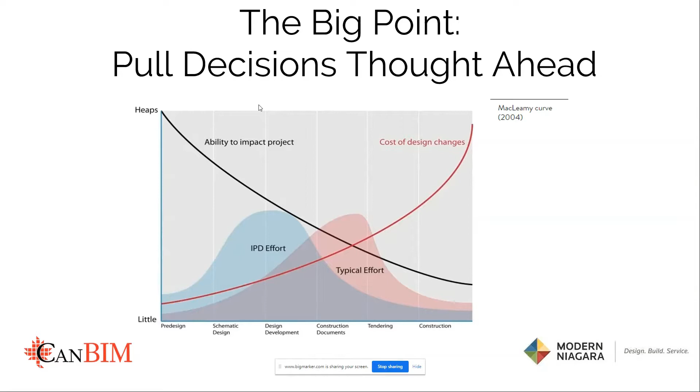So with that in mind, this is the first part, which is probably the biggest part of this presentation: the day that the Calgary CanBIM audience, that's you guys, saved $1 million with a toilet. My hope is that this concept, A, makes sense, and then B, it can sort of spread a little bit, because I think we've got something here.

So I work for Modern Niagara. Modern Niagara is a mechanical contractor. We've got offices in Toronto, Ottawa, Calgary, Edmonton, and Vancouver. And we do a number of different institutional, commercial, light industrial projects across Canada. So we know toilets. That's what we install day in and day out. My hope is that we can teach you about toilets.

So this will blow your mind. That right there is a wall-mounted toilet. You can see it's wall-mounted because it's not on the floor. This here is a floor-mounted toilet. You can see it's a floor-mounted toilet because it's on the floor.

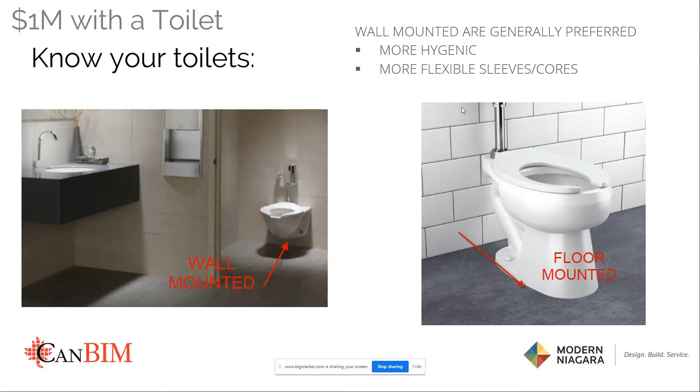What I've seen in 15 or 20 years of being in this industry is that I have not seen many commercial floor-mounted toilets. Most commercial, institutional, hospitals, data centers, office towers, they always use wall-mounted toilets because it's easier to clean underneath, and it allows a little bit more flexibility in the construction process. A floor-mounted toilet has to be perfect. The hole that goes through the floor has to be perfect, and that means the wall has to be perfect after the fact. That's why there's usually wall-mounted toilets. I've probably seen 5 total in my career for floor-mounted, maybe 20.

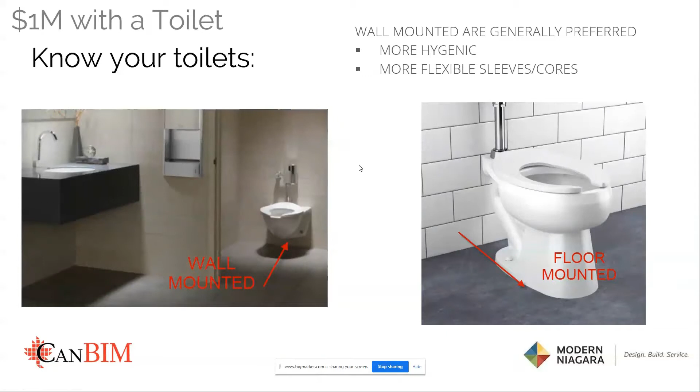So what you may not know about is what attaches the toilet to the wall. There's this thing behind it called a carrier. It's a structural piece that does a bunch of stuff. It creates a solid attachment from the wall to the concrete below, because that's the strongest thing that we've got to attach to. It's allowing for slope drainage, which I'm going to get to later. And it also allows for the flexibility of the wall thickness, because sometimes walls have different thicknesses depending on if someone has some fancy tile or paint or wood or whatever on the wall.

It also allows for deviations in concrete. I'm not sure if this is evident, but concrete sometimes has little bows in it, depending on where it is between the columns. Also, tile thicknesses can sometimes be adjusted mid-project. And then there's also mistakes. So the carrier fixes a lot of issues as listed above.

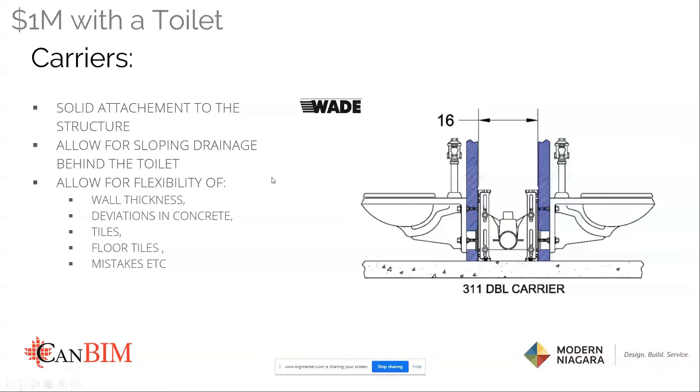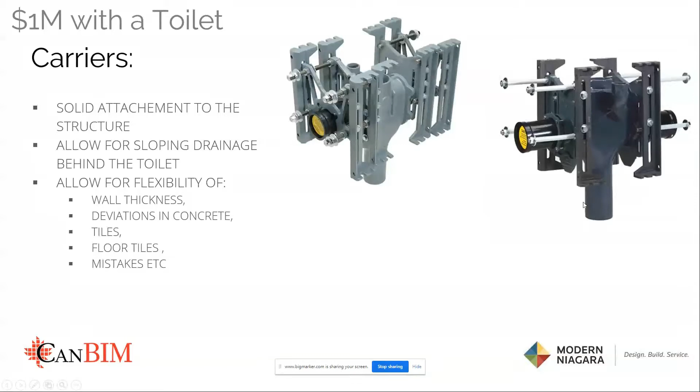This is what a carrier looks like. This carrier right here is for bariatric patients in hospitals. It's very, very strong. It can hold 1,000 pounds. This is a more normal vertical carrier. A lot like that floor-mounted toilet, it involves a really high level of commitment. Here we've got the horizontal carrier, which I'm going to refer to later.

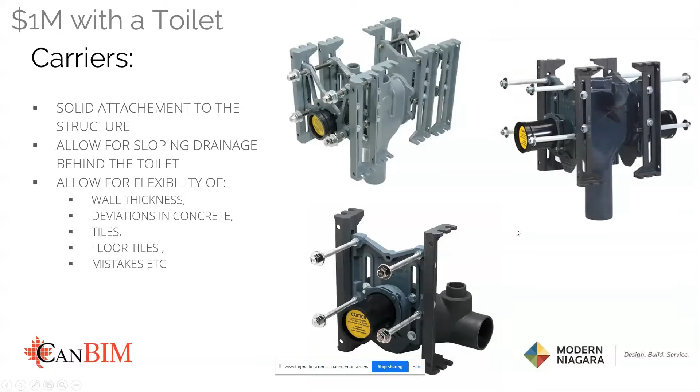The waste comes through the back into the toilet, and then it goes off this way. Fun stuff and exciting stuff, I realize, but I'm getting somewhere with this. So here's the carriers being placed on sites.

So previously I was saying that you need to allow for slope drainage. If you can see here, the pipes are sloped ever so slightly from one end to the other so that there's a drainage fall. You can see it really pronounced here. It's going to this direction to the left. So here's a little higher and here's lower, and that's what all these bolts are achieving here.

You're allowing the slope to exist and still have the toilets at the same level, because if you looked at them and they were all different heights, that would be weird. So it makes the architect and the client and the cleaning and everyone else happy, because it looks the same, but behind the wall, everything's changing a bit.

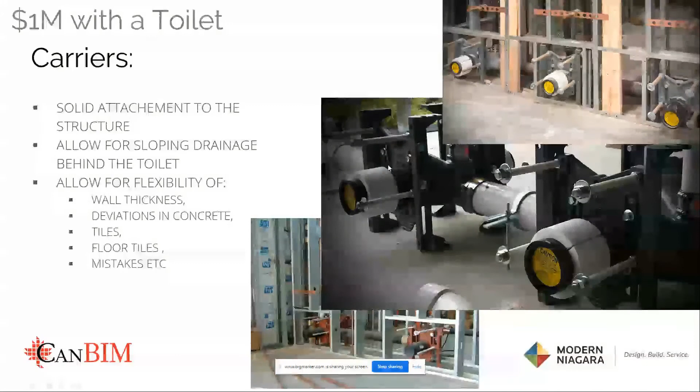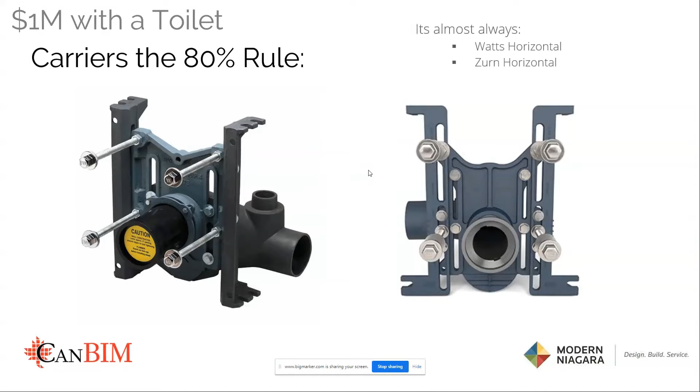So there we are. Now, one of my mentors was a foreman at Modern Niagara. His name's Lee Mehta. He's probably one of the smartest people I've ever met. And he had a rule. I went and asked him when I was like 24: what should someone do if they want to do a good job? What's the secret, from someone who's 60 years old and has seen many projects across Canada? His quote was, "The best projects are sleeved well and the worst are not."

So I'm not sure if you guys know what sleeves are, but I'm going to underline this. Again, a lot of what I'm saying here may be realized by, I'm hoping there's some consultants in the room.

I asked a question in the Q&A, Curtis. I don't know if anyone's answered it. Have we got any consultants or owners in the audience? Curtis, you there? We haven't got any answers yet. Yeah, right here. Did anyone answer that? I can't see that. We've got nothing on the Q&A yet. Okay. All right, so I'll move through this.

So a sleeve is literally a commitment cast in stone. I'm showing pictures of sleeves here. If you look on the floor, can you guys see my mouse okay? Yeah. So here you can see all of these sleeves. Basically, they're tubes that are placed before the concrete is poured. They're a very, very high commitment item, and they cost a lot to implement well, and they cost even more to get wrong. So I'm going to go into that a little bit later.

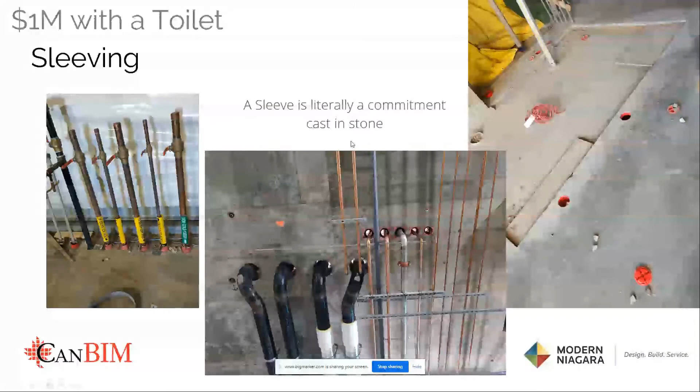So what is a sleeve? A sleeve is a hole through concrete, but it's a commitment. It's a commitment cast in stone. So here we've got a horizontal carrier that we've talked about earlier, and then there's a sleeve through the concrete. These are sink carriers, and here's a close-up of it.

And we use Trimble survey laser rangefinders to position our carriers before anything else is placed in the building. This is a very accurate process. We do it well. Historically, we used to have a failure rate of around 6 to 10% on our sleeves. Now, on our most recent projects, we're actually getting below 1%, if not 0.5%, which is pretty amazing. That level of accuracy has happened in the last 4 years, which is pretty great.

So the sleeve here that needs to happen is defined by the sink. In this case, here it's defined by that toilet. If you look here, the sleeve, I'm going to get to this later, the sleeve is driven by the place of the toilet, not the other way around. And there has to be a lot of precision here because you haven't got a lot of room for extra pipes or whatnot. You can't fit any extra bends and all that. You have to do this well. And if you don't, you're into a pile of trouble, which I'm going to get to shortly.

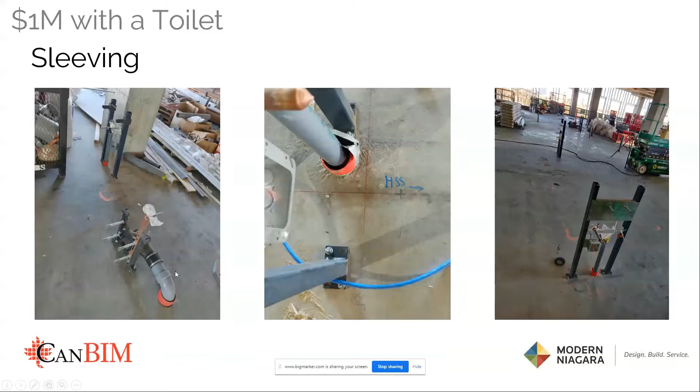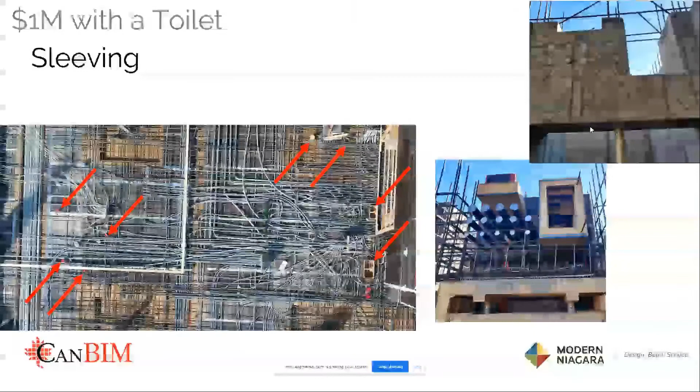The things on the right are wall sleeves for a Canadian Nuclear Safety Commission approved LINAC vault. And it shows, again, the level of detail and multi-trade coordination that has to happen with sleeves. Back to Lee's comment, a sleeve is a really big deal, and it's hard to get right. And if you get it wrong, what happens if you miss one? Well, the answer is it's not good.

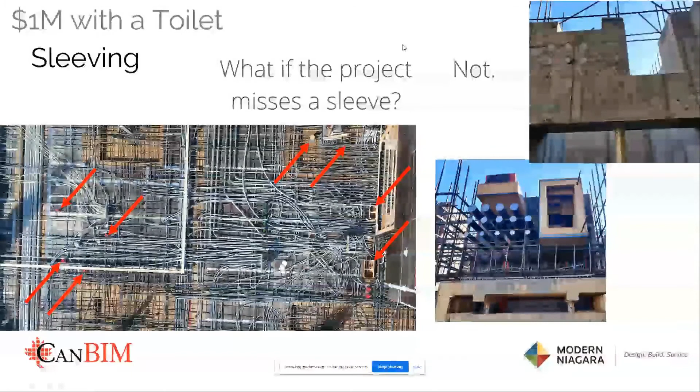So if you do miss one, you're going to have to do something like this, which is called coring. Coring is a nightmare. It's really, really bad. I'm sure most consultants and owners, if they've heard of this kind of thing, think, oh, the trades have to do a core. That's crappy for them, and it is. It's really bad for the trade. But I'm gonna try and make the case that it's not just bad for the trade; it's bad for everyone. So here's a story of a core.

Step one, we think we've got a toilet figured out, and we mobilize our site laborer, site installer, and journeyman tradesman or apprentice tradesperson to go and install one of those carriers and the pipes and all that stuff around it. So the worker goes there and mobilizes to the location where there should be a sleeve. He's happy, he's good. Step two, the site worker finds no sleeve, but only after searching for it for a half hour because they hope that there's a sleeve. And now they're going around bashing on the concrete, trying to find if it's been slightly covered by a little bit of concrete. So they've wasted a half hour.

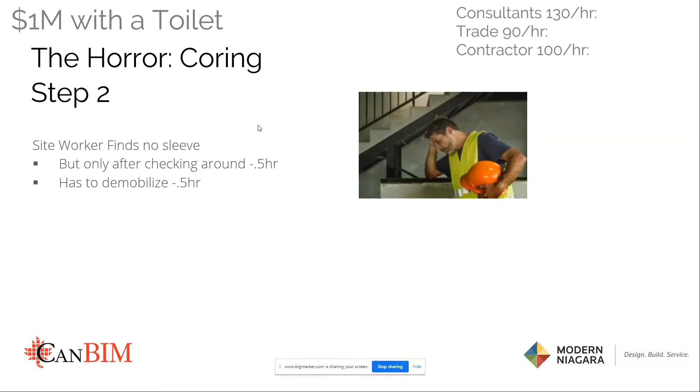Then they have to demobilize, because all of that pipe that was on their shoulders is now not useful, and they have to go find another job. So they have to go back to the site trailer or their site foreman and figure out what's going on, but only after they've talked to the site lead and the site lead has come and looked at the problem and realized that the problem exists and what the hell they were going to have to do about this. So the point of this is we're now out $135 for one sleeve on our site labor.

Now the office staff is engaged. So the project coordinators, the BIM staff, the project managers, and the trade office are now engaged with a problem. Someone has to go capture photos. Someone has to find alternate routing, looking around on the site and possibly in the BIM model. Coring and X-ray has to be performed.

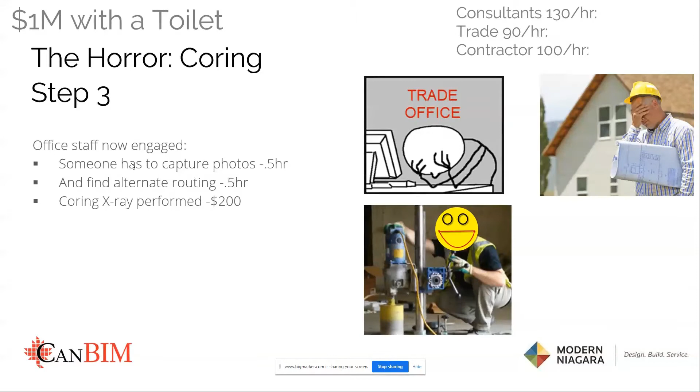The only person who's happy in this one is the coring supplier or installer. It's usually subtraded out because it involves a lot of expertise, such as using X-rays, seismic or ultrasonic scanning. It's expensive. Each sleeve is going to cost roughly $200 for finding what's below. And if you remember all the concrete and conduit and the rebar and all that stuff, that's going to cost $200 each time because you have to scan everything.

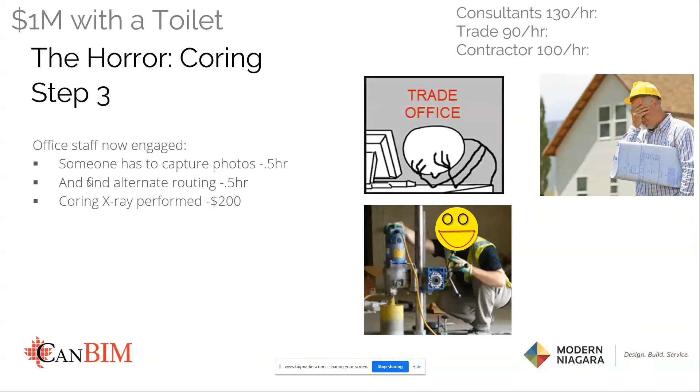Oh, sorry, and the PMs have to write an RFI to officially submit to the project team, which is the GC and the consultants. So now we're at $850 minus out of the trade contract. They typically don't get paid for it. This is all ripped out of profit, which is not good.

Again, if you refer to my earlier sentences on previous projects, we've had 1,000 cores, which was actually deemed to be pretty good on a major hospital. On our recent hospital that we're working on, we're below 200 at this current stage. But there's a hitch, which I'll get to later. So now the RFI gets sent out.

Misery loves company. The GC has to go and read through an RFI about a core, which is going to be complicated. The consultants have to go and review that same RFI. They have to figure out where it is in the building, go through all of their drawings, figure out what they tried to do, and then look at the problem and see what they think of the solution, or come up with a solution of their own. So now everyone's starting to hurt.

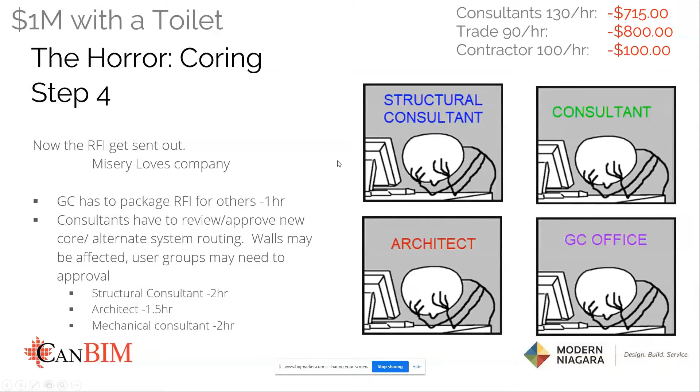And across the whole project, the consultants have spent roughly $715. The trade is now at $800, and the contractor's at $100 because they've had to manage the communication flow at a minimum. The RFI response comes back from the consultants. The GC has to vet it again through their tracking system, as Carl was mentioning.

They have to send it to all parties because all parties have to know about this, not just the mechanical. Maybe the electrician has to know about it because the proposed sleeve might affect them. Or maybe the architectural or the furniture person needs to see it because it might affect where a piece of furniture gets placed. Everyone gets pulled down into this mire. All parties have to read it.

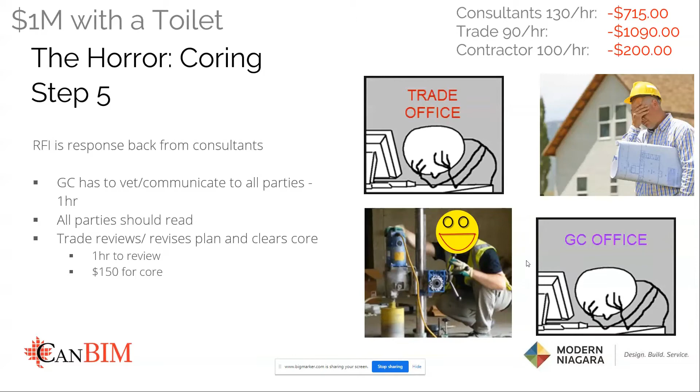And then the trade reviews the approval or instruction from the consultant. And then once they've reviewed it, they have to implement the core, which is actually fairly cheap. It's just all this bureaucracy behind it. So now we're at $715 for the consultants. Trades are now at around $1,000 or $1,100, and the contractors spend $200 on administration.

Then the site worker has to remobilize, which they already did, so we've lost an hour here, and they have to install a workaround which has a bunch of pipes going to another sleeve as opposed to the intelligent routing. It has to be a compromise, wasted pipe, lesser overall product, bad news. So now we're at $1,200 spent by the trade, $700 by the consultant, and $200 by the contractor.

We have a reasonable project cost, which the owner bears because all of those prices are built into our historic trends as companies. So $2,000 per core minimum. The consultants have to spend money and deal with contract management, all of which is avoidable and slows them down and keeps them from getting to another project, which would be more fun, more advanced. And everyone likes drawing a new project. They don't like fighting with cores. It's soul sucking. But wait, there's more.

We actually have seen cores that were required that have cost Modern Niagara $25,000 each. We're working on 2 cores in the project that I'm currently working on, 2 cores that are costing $50,000. Why? Well, as buildings get more and more efficient, and engineering gets more and more efficient, and owners demand more and more cost optimization, rebar becomes engineered to a very finite degree. There's not a lot of extra strength left in the building.

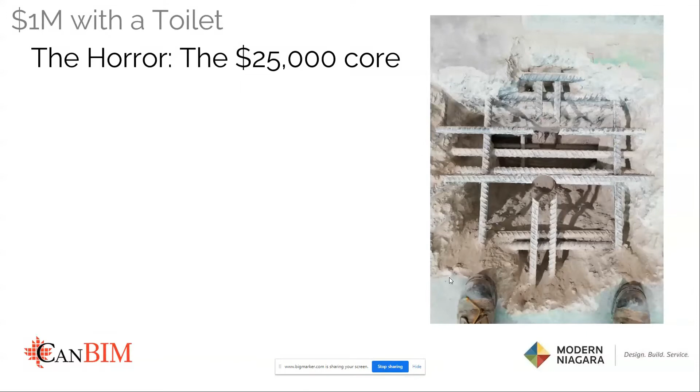If we hit a core because a scan was done improperly or a mistake was made on site, and those things happen, and you cut 2 things just like this, then you have to jackhammer this hole, which was done by our forces, above and overhead from the floor below. Then they have to get an engineer to figure out how to weld all these bars together in a form that's as strong as the original shape of the rebar.

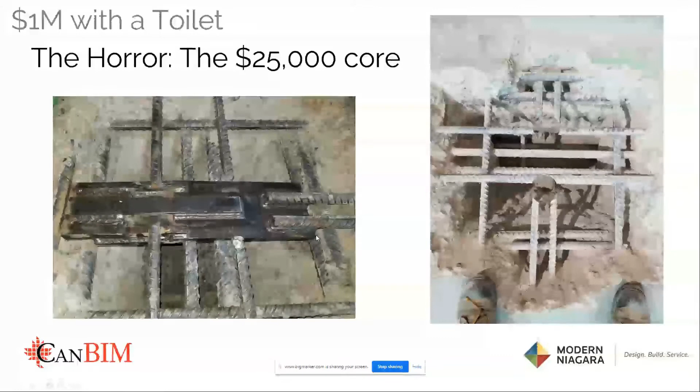That's what you're looking at here. You're looking at rebar with welds that are like 5 to 8 inches long. This takes like 4 hours to build. It's a position weld. It's slow. It's horrible. It's bad.

So $2,000 is the minimum, $25,000 is the maximum. Somewhere in between is the average cost to the building owner, the consultant team, and the entire project. We're not just talking time or cost, we're also talking time delayed, extra labor power that's needed, people doing boring work, which is no fun. We can avoid this as an industry, and we should.

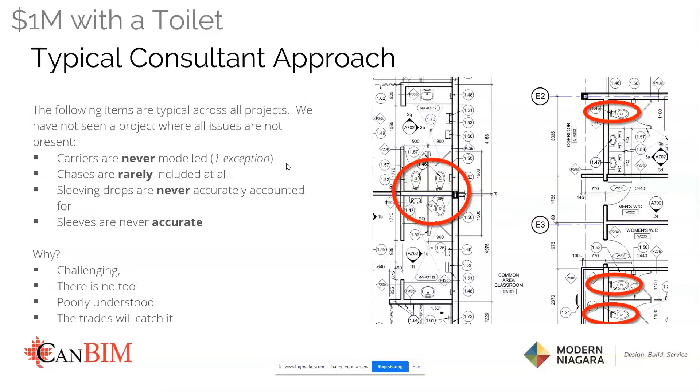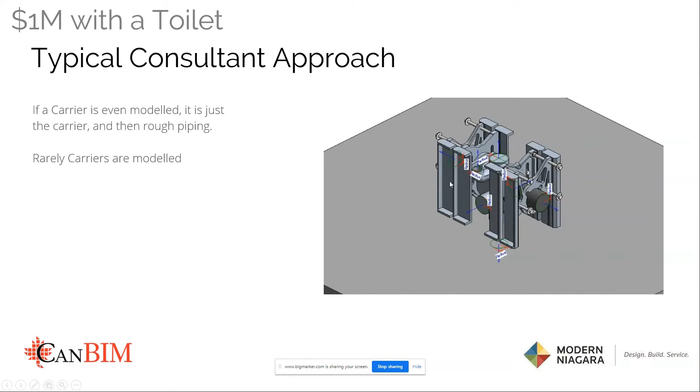So if they do model it, they model just the carrier and then rough piping. So just throw down a carrier like that we see in Revit. Rarely are carriers modeled accurately at all. And generally, I have not seen a carrier modeled accurately except for one project.

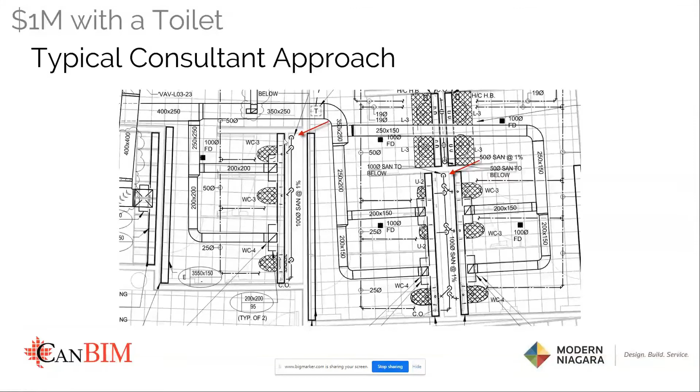So this is a typical RFI that we have to figure out. What we do is we go through and audit at the beginning of a project, or as fast as we can. If it's too big a project, we just do it in front of the project critical path. We go through and we make drawings like this. So we say the sanitary chase is not wide enough for water closet carriers. Please approve our proposed location for walls, or find an alternate. This takes us tons of time. The cost to the project is tens to hundreds of hours of BIM work, depending on the size of the project, to go through and make these red lines on the consultant drawing.

Then the architect has to go and check and make changes to their design at roughly 1 to 3 hours per toilet. It might not take the architect 1 or 3 hours to move the wall, but you have to remember their contract administrator has to read through the RFI. They have to bring up the RFI, load the model, get their head into the game, and then make the change that is proposed if it's deemed acceptable. If not, then they have to spend 2 hours finding something else.

It's a huge waste of time. One of these RFIs can take them a lot of time. The structural consultant is going to have to then check, once the architect's approved, all of the toilets to make sure that the holes are okay.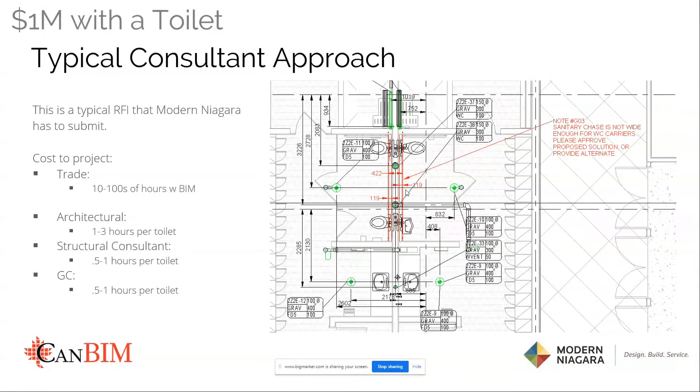The general contractor has to manage all of the walls that have been moved around. Maybe they have to retender the walls, or they have to allow for costs which are now outside of contract. Everyone knows that outside of contract changes cost more, and costs balloon to the end owner. Bad news. This is an example of the level of changes that have to go in just because of water closet carriers on one tiny drawing.

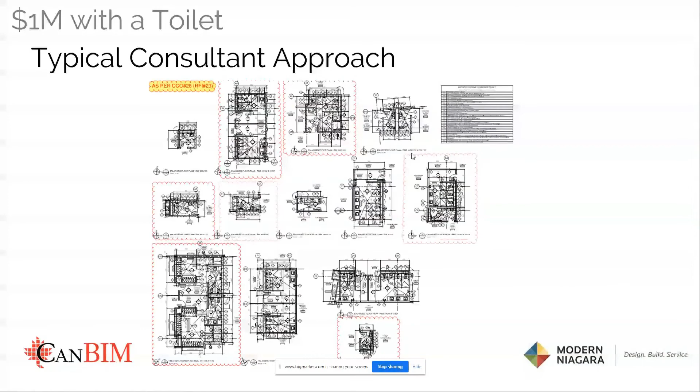The project that this pertained to, we had like 10 drawings that were updated, all for the RFIs on the water closet carrier issue that we've been outlining thus far. So the cost of each RFI in a small size project, I figure, is $4,000 to the owner, or to everyone, for about 10 toilets. I'm gonna get to this later, and it could be as much for a mid-sized project as $20,000. I'm saying like around 30 to 50 toilets.

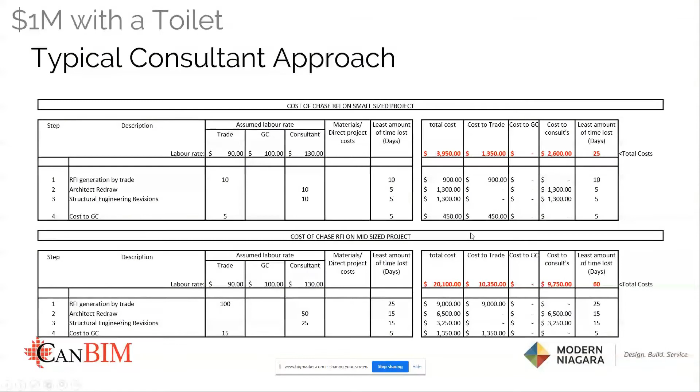For a hospital, which Modern Niagara has been known to build, we're into the hundreds of thousands of dollars at least to the trade group, as well as the consultant model. The approximate wasted time, to make this a little bit more concise, is $400 a toilet roughly for a small project, and $500 a toilet for a mid project.

If you think of the slowdown of finding out the toilets that are wrong, and the sleeves that are wrong, and the sleeves that need to be investigated, for that thing to go from identification to rectification, we're at 25 days for a small project and 60 days for mid projects. That's a lot of risk. That's a lot of slowdowns. That's a lot of waste. That's bad news. And it's a lot of money per toilet.

So now back to the carrier and sleeves, because now we're going to link them together. It may not be evident, but the carrier defines the sleeve. So the center line of the toilet, which is defined by the architect, because they need to know where the toilet is because of building code, to the end of the barrel is the barrel distance. Then you've got the distance from the end of the barrel to the sleeve itself.

And you need to leave room for a 90, maybe a 6-inch stack, because you could have a 4-inch stack or a 6-inch stack, and then a little tiny piece of pipe in between that allows for flexibility if any one of these things is off. If you're short 1 inch and you don't have 1-inch tolerance, then you've made a mess. So you need to leave a tolerance piece. But this means that the distance from the green line to the far yellow line is finite.

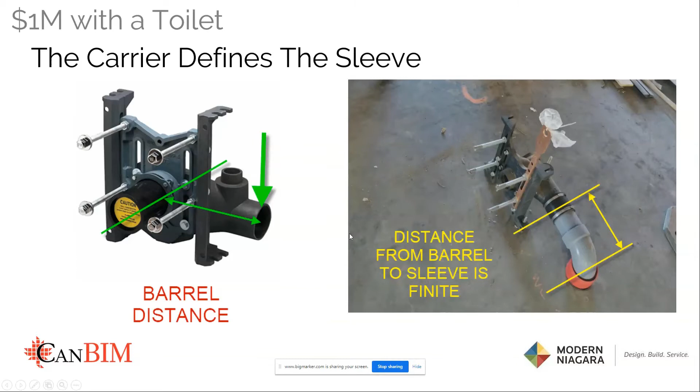Let's recap. Coring is really bad. No one wants to do coring. It's either $2,000 to $25,000 per toilet. It increases the cost for all parties, slows down the project, increases project risk, and the missed sleeves lower the quality of the end product because now you're starting to add bulkheads. The thing looks like garbage, and it's not a good building.

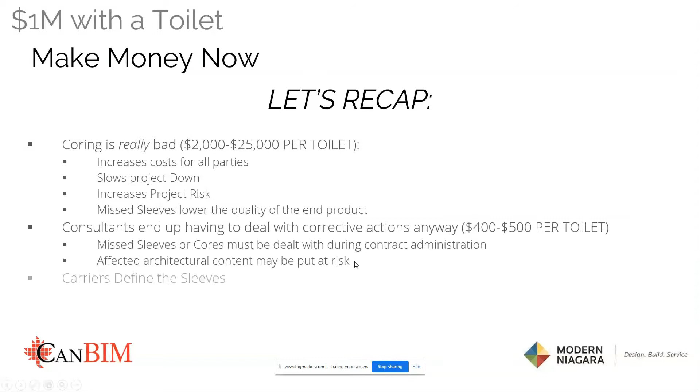The consultants end up having to deal with corrective actions anyway, because they have to redraw it if it's a core or if it's caught before a sleeve has been missed. The consultants still have to deal with it. Missed sleeves or cores must be dealt with during contract administration. The affected architectural content may be put at risk. It needs to be analyzed and it needs to be dealt with. And the carrier defines a sleeve.

So now, if we could give this RFA, or Revit family, to the consultants, without knowing the ins and the outs of everything, they would be able to place their sleeve targets. Then the following becomes self-explanatory. Trade knowledge is now not required by the architect or the mechanical engineer.

Immediately, the architect can see if their chases are the wrong size by using the sleeves, and they can also identify where their cores should be. What if there's a column cap or a beam below? The structural engineer can say, I'm not letting you put a sleeve there. All of that stuff that ends up hitting them in duress once the project's been awarded at great cost can be completely avoided if the architect and mechanical engineer use the RFA sleeve.

In the meeting that we've got going on right now, Carl has uploaded a document that has a hyperlink to this RFA sleeve here. This would help the industry if we just use these things. We have to use them anyway. It's already built into the process.

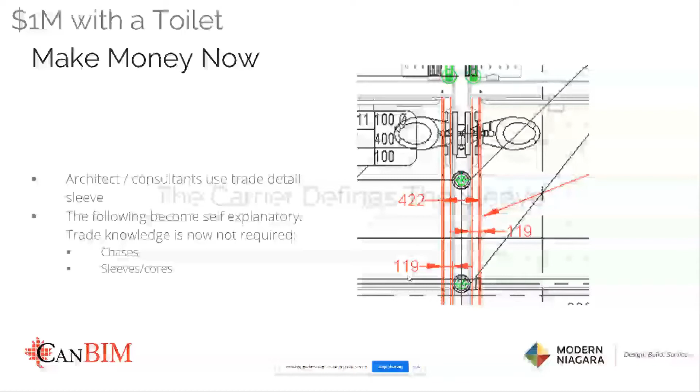But if the consultant used it, as they did on the most recent project that we're working on, which is a fairly large hospital in Calgary, what we did was we gave this carrier to the consultant, and all of these discussions and all of these RFIs dissolved. They were dealt with at the design level, not at the trade level. The entire project, I figure, saved at least $500,000, if not $2 million. Think about the amazing impact of providing good trade quality detail to the consultants.

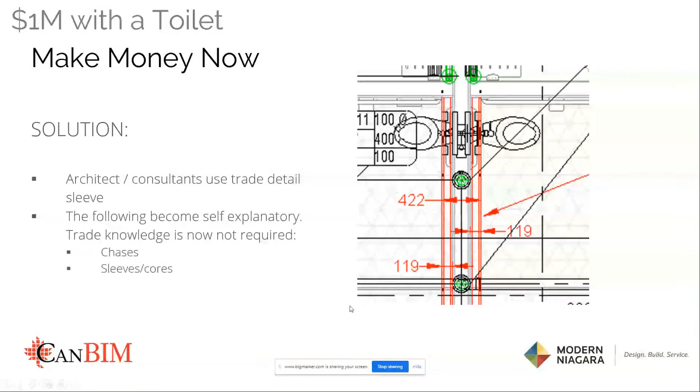We're at 7:46, so time is going pretty well. I'm going to move to the next thing.

So coring is really bad. To recap, consultants end up having to deal with it anyway. At a minimum of $400 per toilet, all we need to do is place 2,500 water closets based on this RFA family right here. At the easiest case, and at the worst case probably around $1,000, we can save $1 million of profit in Canadian CAN-BIM methodology by implementing this very easy process right now.

Or better said, we're wasting $1 million every time our industry does not fix this very intricate but simple problem that we are doing to ourselves. We should be saving money. We should be not accepting traditional processes that allow these changes to go on and on throughout our industry. It's an easy way to save a pile of money and work more effectively.

Think of all of those RFIs that don't have to happen. Think of all of those people that can now work remotely, as Tom was saying. Think of the communication that now happens without even speaking. It's phenomenal. This kind of thing and the thought behind it is what I believe the subtrades and the consultants and the owners should be looking at with real eyes, figuring out how to implement for system-wide efficiency.

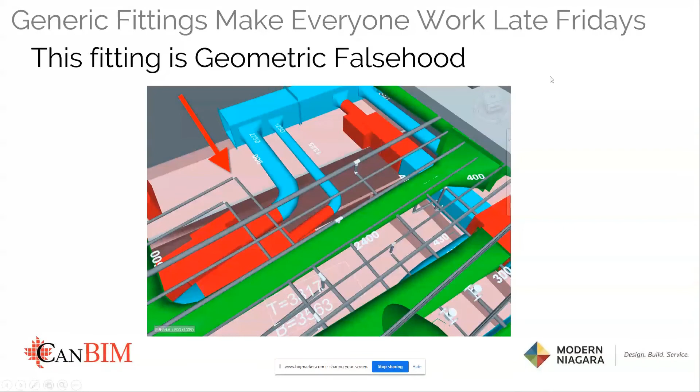Now, here's another example to the same exact effect. So generic fittings come in Revit, and we see these all the time. This is a consultant model of a very recent project that we're working on. That fitting is impossible. No one makes a 90-degree fitting that small, which means you're making a geometric falsehood. Using pipe fittings that are impossible to install drives the consultant away from the realistic install. It starves the consultant modeling group from the ability to model reality.

If they model a lie, then they have difficulty comprehending, just by the system that they're using, what is actually real and what is installable. Back-to-back fittings are now false. This is a huge effect because it throws off how pipes are placed in a building. What looks fine in a consultant model can end up being impossible simply because the fittings are a lie. Pipes are allowed to be put too close together, and all geometric agreements are now compromised. Again, we've made a geometric falsehood.

It is likely that the use of generic Revit fittings is one of the major reasons that consultants have such a hard time making realistic, installable, and coordinated models. Unless the consultant modeler understands how big a fitting is in their head and then puts it into the model, they'll shortchange all of the room that it actually takes to do things. This is a welded 90. Welded 90s are the biggest 90s.

If you make a system that can fit a welded 90, you've made a system that can fit any 90: copper, Victaulic, mechanical joints, screwed fittings. The welded 90 is the biggest. These are very easy to get and available with any internet search.

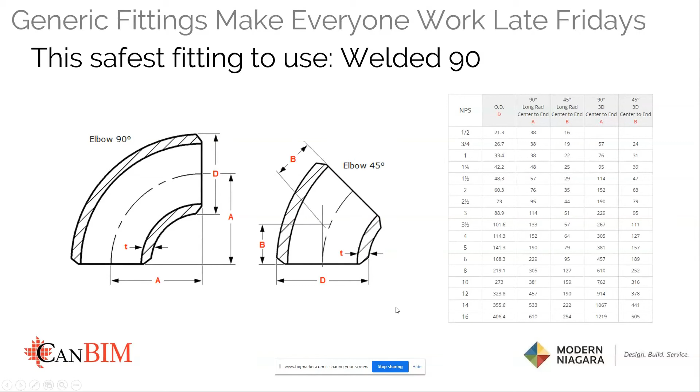And the rule is that the nominal diameter, which is listed in this chart, compared to the dimension A, is 1.5. So if you have a 2-inch fitting, it's roughly 75 mils on A, exactly. If you have a 4-inch fitting, it's 150. That pattern exists. It is not shown, and the libraries are wrong in consultant models. If the consultant models just change the libraries to welded 90s, then every geometric commitment that they make would now work.

You can see from our model that the 90s are much bigger than this one, meaning the sweep. The 90 sweep is bigger, and we know where to put the T compared to the 90. Whereas a consultant model might put the T too close, and then they hit a wall on the far side because everything has to move forward. That's the kind of subtle impact that a generic fitting makes. A generic fitting should be illegal.

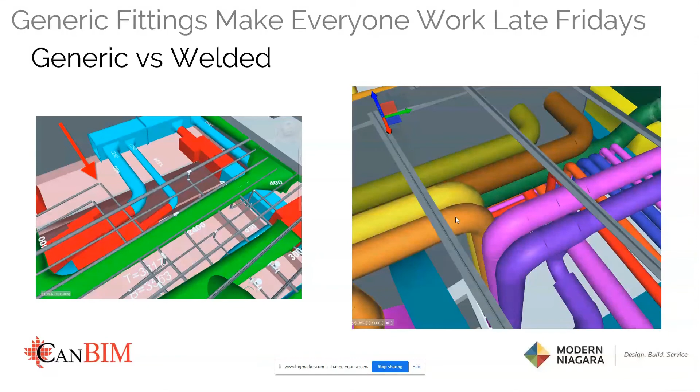These should be illegal. What should happen is a consultant just changes their libraries to welded 90s, and now you've got solutions that work everywhere. Your own modeling group starts finding out what's wrong with the building rather than not being able to determine it because the fittings sort of lie. We can implement this now with any consultant, and it's a good metric, a good thing to reach for in our industry. If we saw this, then the subtrades would be able to create their models faster because they wouldn't be making as many corrective actions to the building at large. Things would just sort of work.

So the consultants have to draw the fittings anyway. At no cost, the consultants can uncover much more project risk earlier because now they can see the reality of what the fittings look like, where they don't have to wait for the trades. There will be a natural education of the consultant modeling group that is currently trapped in the trade group. What I mean by that is because they don't know what a real fitting looks like, they don't think like an installer. By using a real fitting, they'll start naturally thinking like an installer, and all of the problems will be wiped away at the earliest stages of the design.

Think back to the MacLeamy curve. You're taking what would be a bad problem at the later stages of a project and pulling them towards the earlier stages, saving a lot of money and allowing the project to be built faster with less risk. Everyone wins, and everyone gets a lot more profit because there's not as much contract administrative cost dealing with RFIs and mistakes that have been made and that are inherent in the design.

VAVs are similar. So here you've got a VAV by the consultant side, and here's our VAV. And I'm even going to bring this up. Ours aren't perfect. We have complaints with our own VAVs because we constantly see what needs to be improved upon. Our VAVs show the coils clearly. We also have got a measurement from the coil to the pipe because there needs to be a coil pack between the two of them.

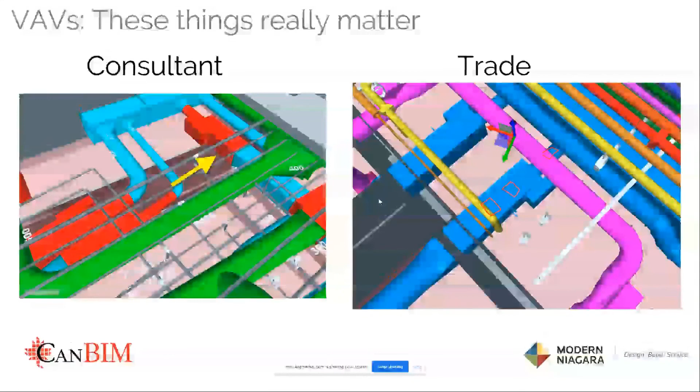Said again, we should be drawing the access hatches. We should be drawing the coil connections. We should be drawing something like the coil packs. It doesn't have to be precise. The coil packs are the balancing valves and all the valves that go in front of a VAV. And the minimum upstream length. There's a VAV requirement on the airflow going through the VAV.

If we were to do these tiny little things well, which again is just taking 10 to 40 hours to do one family that can be used on all projects going forward, then the consultant would have a much stronger model, which would mean that there's less repair to be done by the trades or the site installers, which is inevitably what's been happening in the past for our industry.

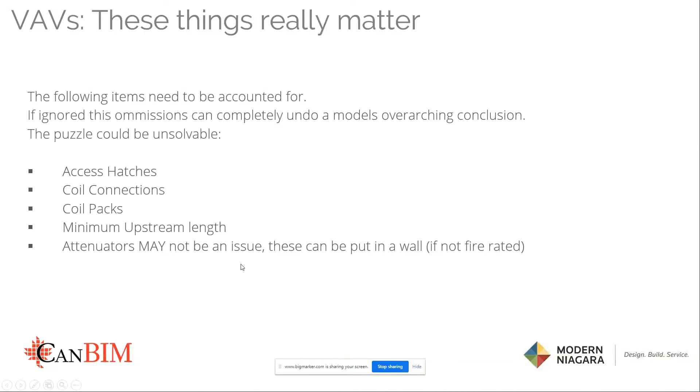Attenuators may not be an issue, but they can be if it's fire rated. That's a little asterisk if someone wants to get advanced.

Some ideas for fixing the problem are create a generic worst case VAV from preferred trades. If you're a consultant, why not phone your top 3 or top 2 trades, have a meeting, and let's make a community-based communal family that implements all of the things listed here. Call your trades, find out what they prefer for VAVs, and figure out if they can help you get rid of a lot of the issues that are just buried into the design due to an insufficiently detailed VAV.

The GC could also demand, I hope there's some GCs in here, if the GC demanded on a project schedule the VAV procurement within the first 6 weeks on a per item price, because a lot of these things go on all value, like they try to find the precise quantity and then they get a locked in price. Why not do a per item price with approximate volumes? This would work on design build, IPD, and design assist, and it would allow the consultants to have the perfect carrier or VAV or whatnot.

The GC should pull the mechanical trade forward in the procurement planning to figure out how to get their content and their geometry in the models as fast as possible. This stuff leads to hundreds of thousands of dollars of waste that could otherwise be avoided because someone's trying to save $30,000 on procurement. It doesn't make sense.